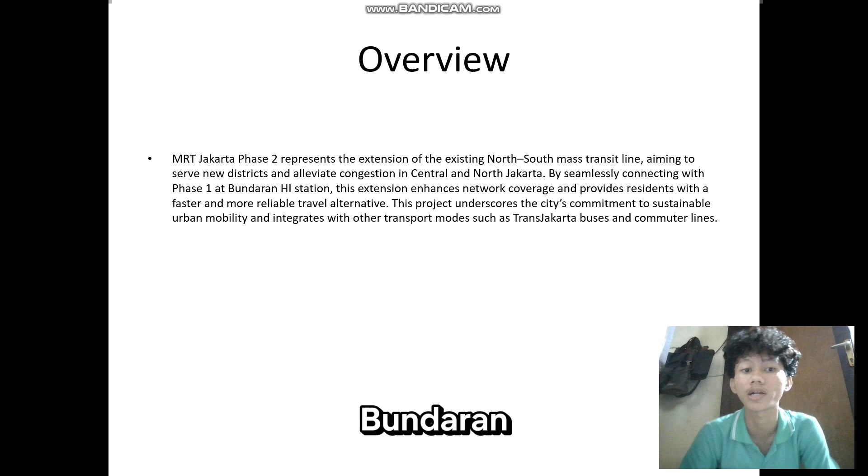So next, by seamlessly connecting with Phase 1 at Bundaran HI Station, this extension enhances network coverage and provides residents with a faster and more reliable travel alternative. So basically, this Jakarta Phase 2 MRT is connected with the first phase at Bundaran HI Station. So with this extension of MRT Jakarta, the purpose is to provide a faster and more reliable travel alternative.

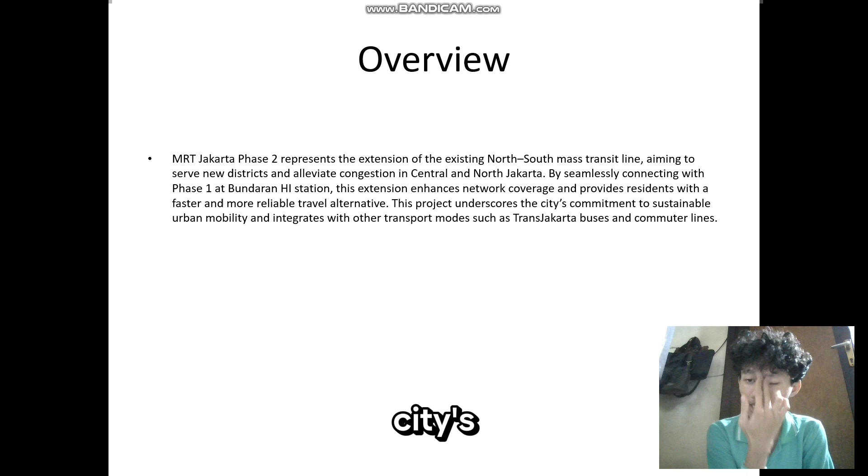So this project underscores the city's commitment to sustainable urban mobility and integrates with other transport modes such as Transjakarta buses and commuter lines. So we are going to the next slide, the name and location. Officially designated as MRT Jakarta Phase 2. So the name of this structure is officially MRT Jakarta Phase 2.

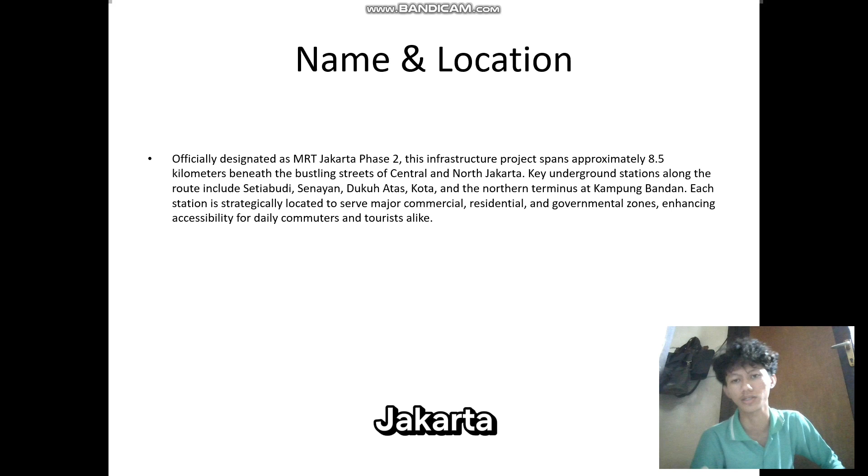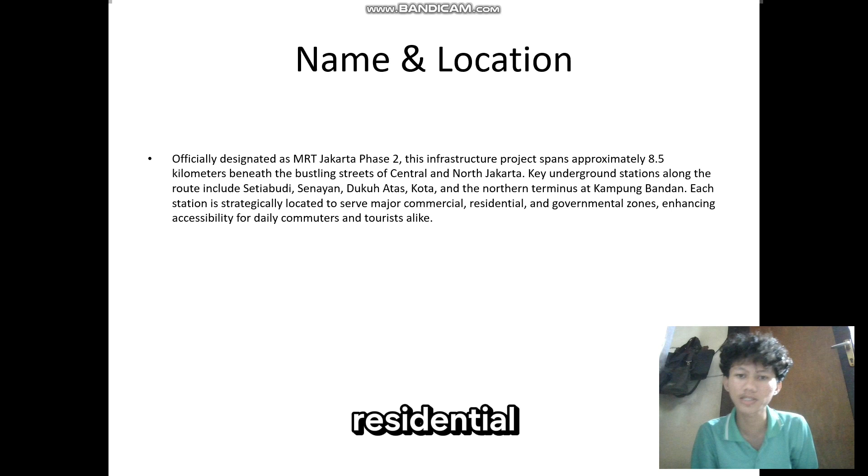And this infrastructure project spans approximately 8.5 kilometers beneath the bustling streets of Central and North Jakarta. So the distance is about 8.5 kilometers. Key underground stations along the route include Setiabudi, Senayan, Dukuh Atas, Kota, and the northern terminus at Kampung Bandan. Each station is strategically located to serve major commercial, residential, and government zones, enhancing accessibility for daily commuters and tourists alike.

So this kind of structure has really positive features, such as enhancing accessibility for daily commuters and tourists alike. It's really futuristic and maybe so useful for the future of Jakarta commuter lines. So we are going to the next slide.

Okay, this slide is providing the purpose and significance. So, the primary objective of MRT Jakarta Phase 2 is to reduce road traffic by offering a rapid, high capacity alternative that bypasses surface congestion. This extension is significant for fostering inclusive urban development as it connects underserved areas with economic hubs, educational institutions, and healthcare facilities. So this MRT Jakarta Phase 2 is really useful to our life in Indonesia, basically in Jakarta, because it's useful for public transit to economic hubs, educational institutions, and healthcare facilities.

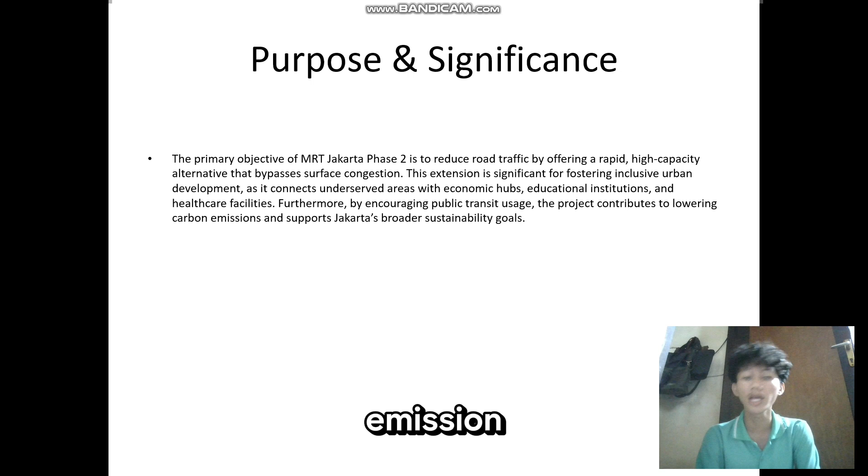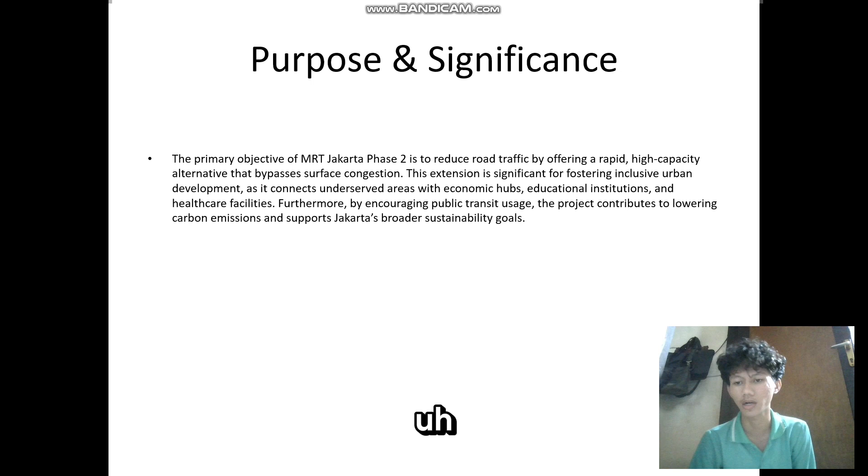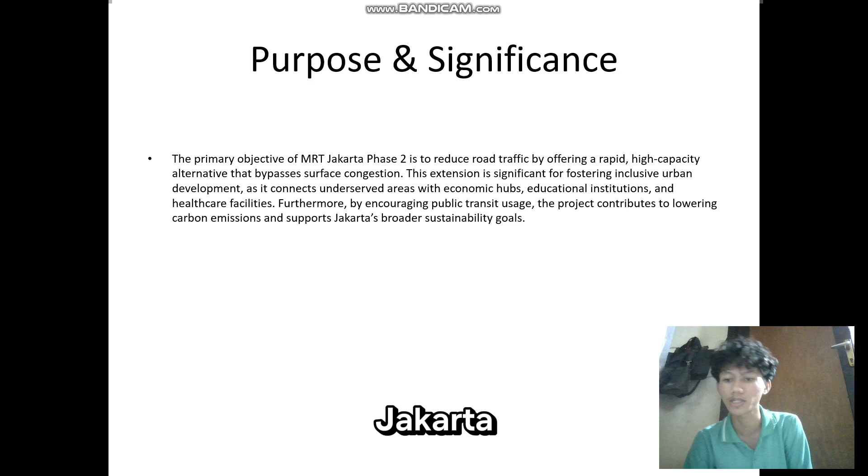Furthermore, by encouraging public transit usage, the project contributes to lowering carbon emissions and supports Jakarta's broader sustainability goals. So, by expanding this MRT, maybe it will encourage the majority of Jakarta society to reduce their usage of transportation like motorcycles or cars, so they can just move to MRT Jakarta to save money, lower carbon emissions and support Jakarta's broader sustainability goals. So we are going to the next slide.

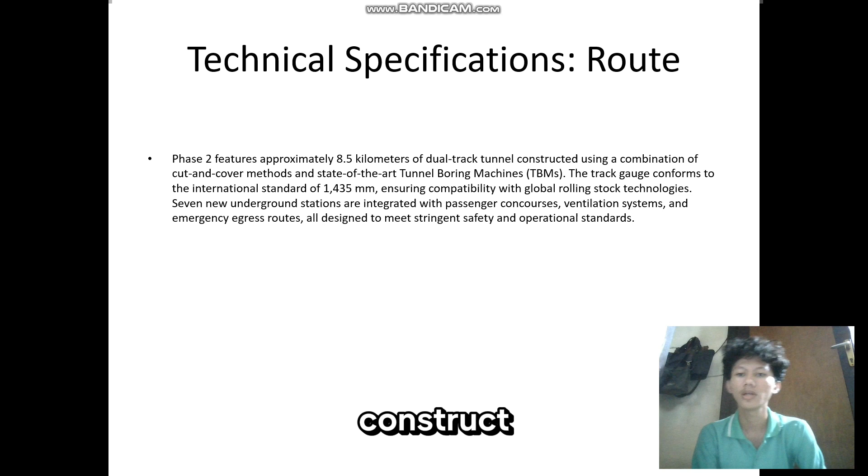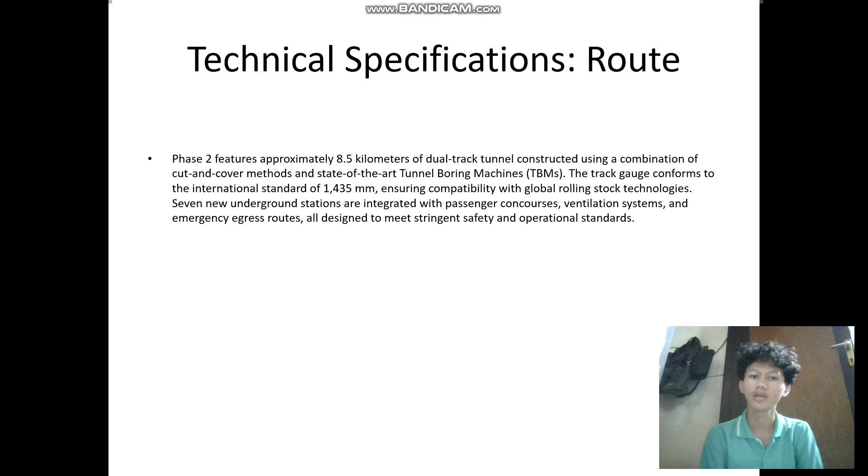The next slide is about technical specification or the route. This phase 2 features approximately 8.5 kilometers of dual-track tunnel constructed using a combination of cut and cover methods and state-of-the-art tunnel boring machines, or TBMs. And the track gauge conforms to the international standard of 1,435 millimeters, ensuring compatibility with global rolling stock technologies. So this MRT Jakarta Phase 2 was really designed with the international standard of 1,435 millimeters in mind.

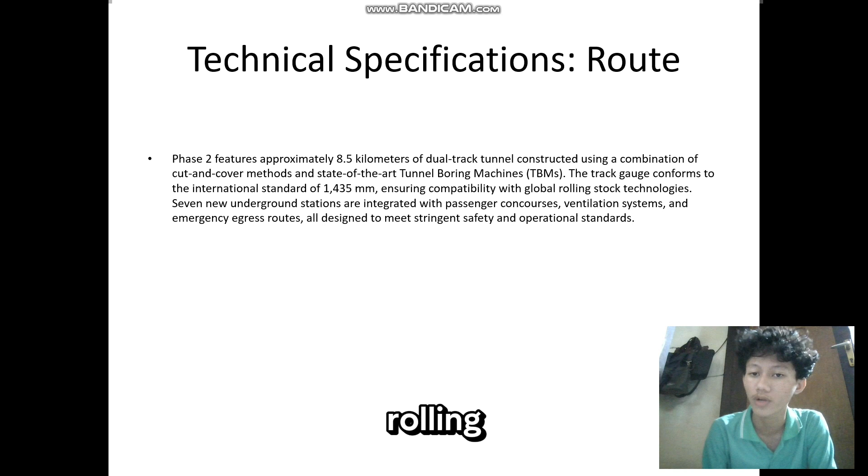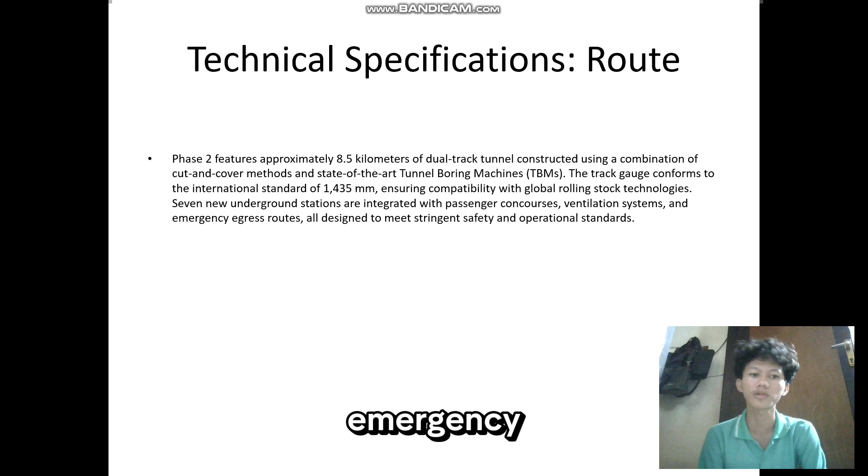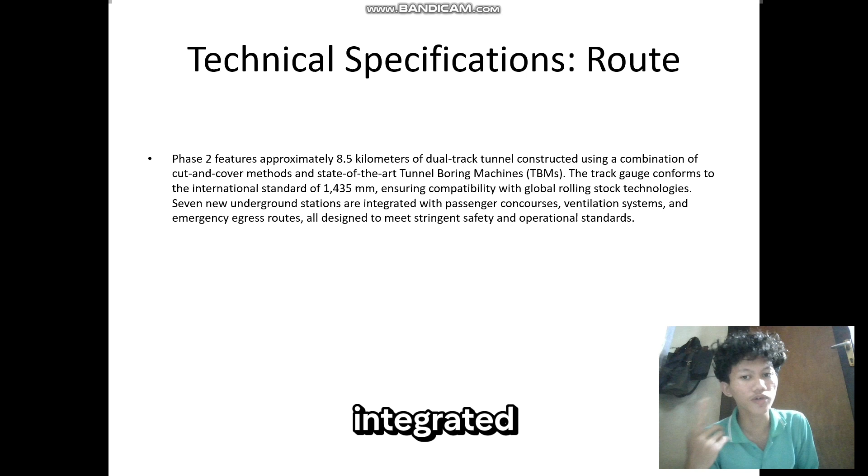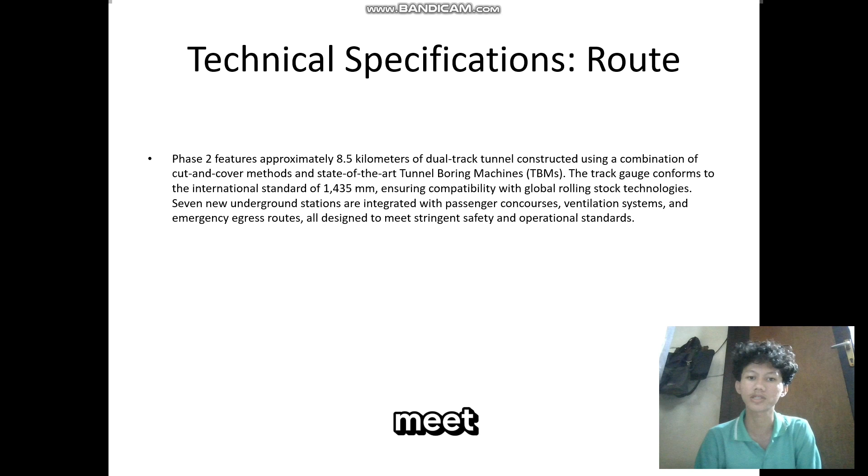And seven new underground stations are integrated with passenger concourses, ventilation systems, and emergency egress routes, all designed to meet stringent safety and operational standards. This MRT Jakarta Phase 2 was really well thought out, again, because it was integrated with passenger concourses, ventilation systems, and emergency egress routes. It's all really useful in emergency conditions. It all meets the safety standards. So we're going to the next slide.

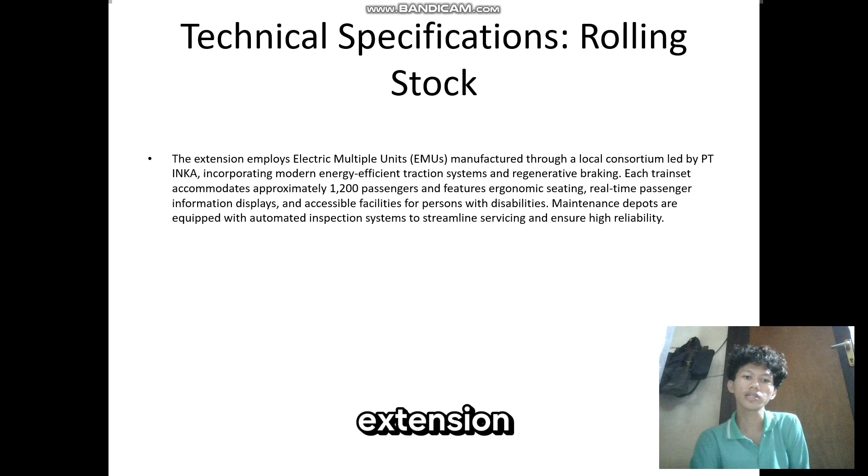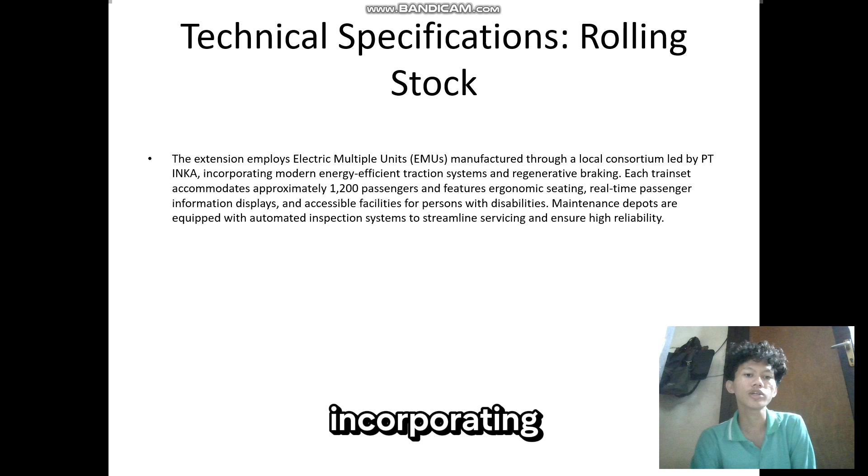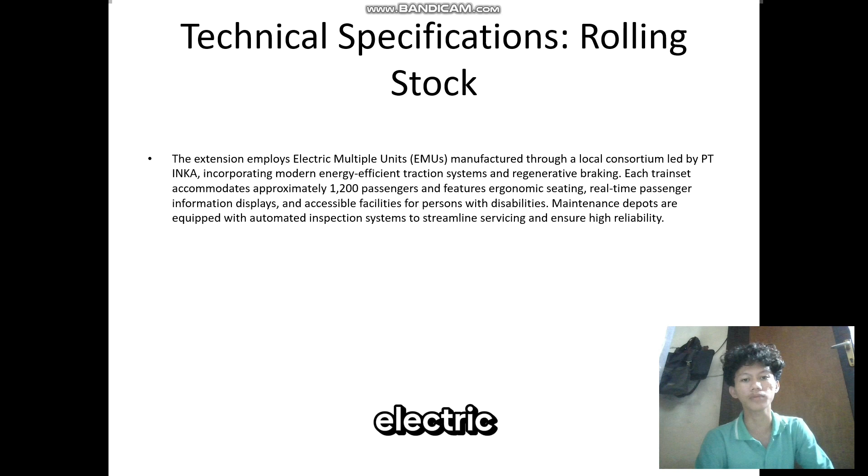The next slide is technical specification in the case of rolling stock. The extension employs electric multiple units, or EMUs, manufactured through a local consortium led by PT INKA, incorporating modern energy-efficient traction systems and regenerative braking. So this extension employs electric multiple units that are manufactured through a local consortium led by PT INKA. They were serving regenerative braking.

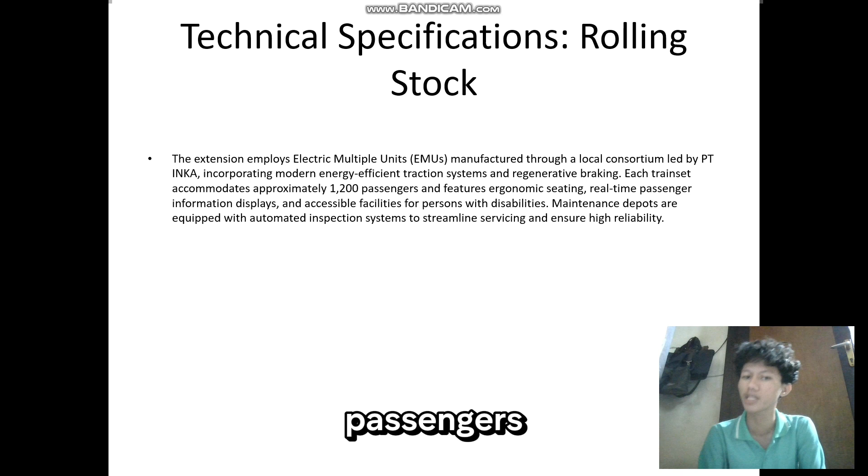Each trainset accommodates approximately 1,200 passengers and features ergonomic seating, real-time passenger information displays, and accessible facilities for persons with disabilities. Its maintenance depots are equipped with automated inspection systems to streamline servicing and ensure high reliability.

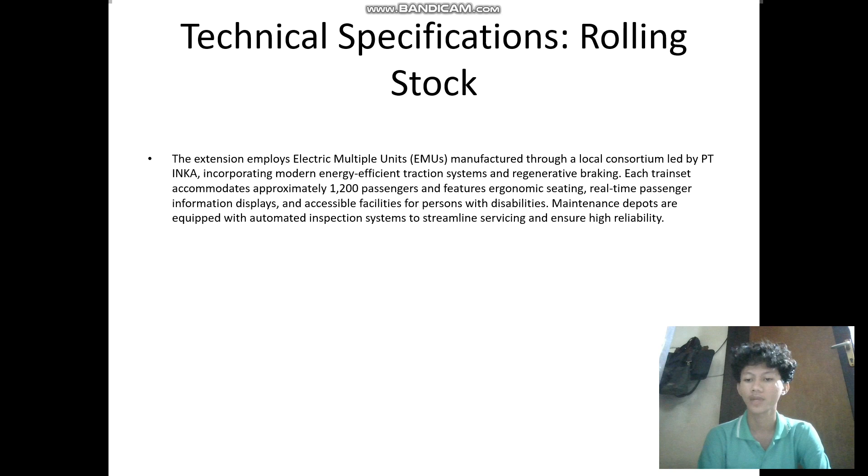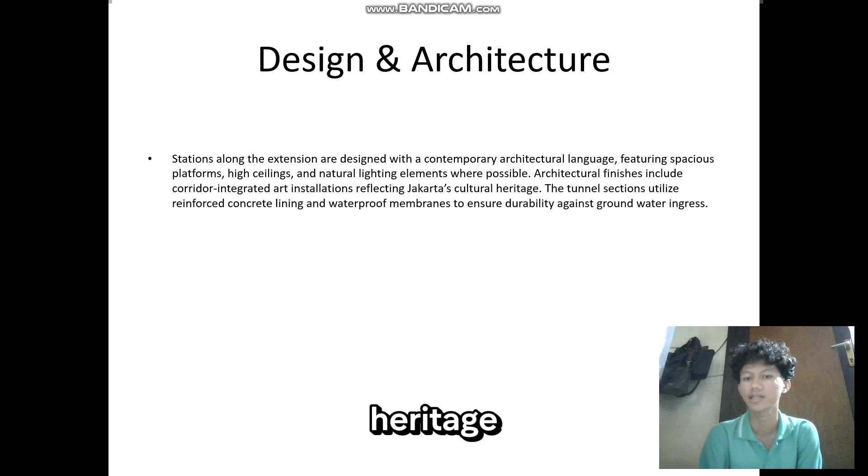So the next slide, the design and the architecture. Stations along the extension are designed with a contemporary architectural language featuring spacious platforms, high ceilings, and natural lighting elements where possible. Architectural finishes include corridor-integrated art installations reflecting Jakarta's cultural heritage. The tunnel sections utilize reinforced concrete lining and waterproof membranes to ensure durability against groundwater ingress.

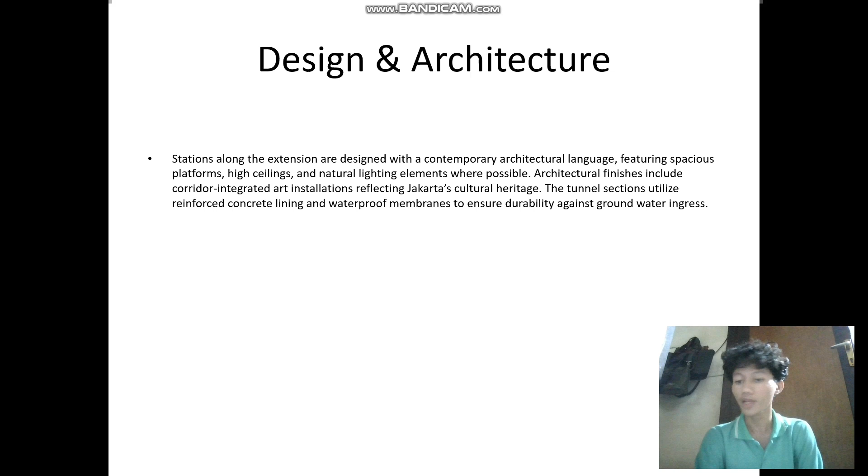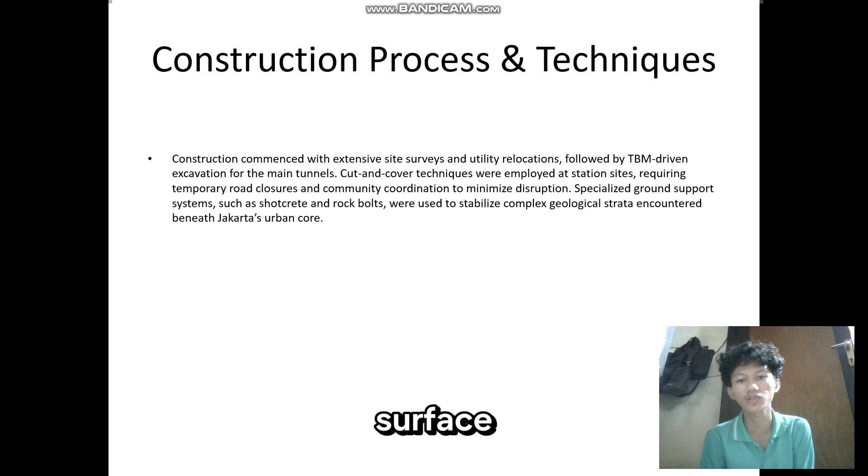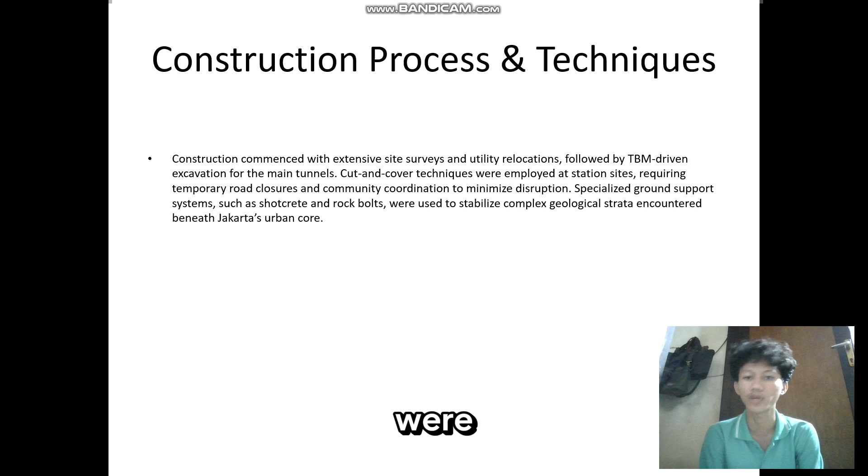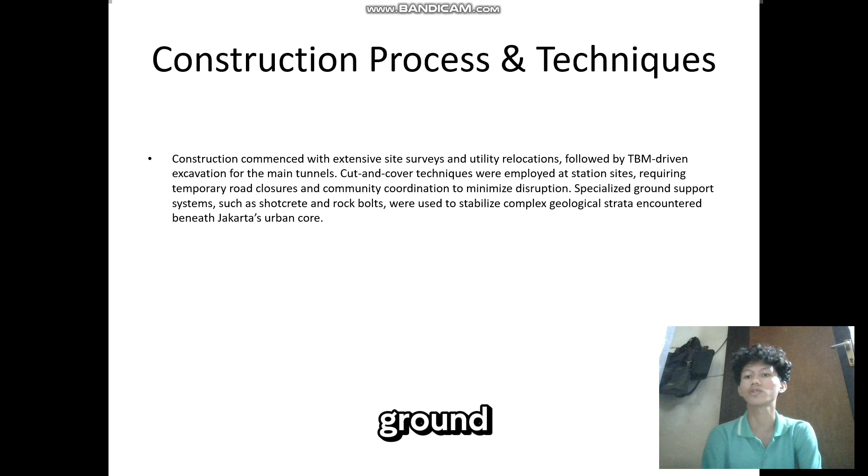So we'll go to the next slide. The next slide is about the construction process and techniques. Construction commenced with extensive site surveys and utility relocation, followed by TBM-driven excavation for the main tunnels. Cut and cover techniques were employed at station sites, requiring temporary road closures and community coordination to minimize disruption. Specialized ground support systems such as shotcrete and rock bolts were used to stabilize complex geological strata encountered beneath Jakarta's urban core.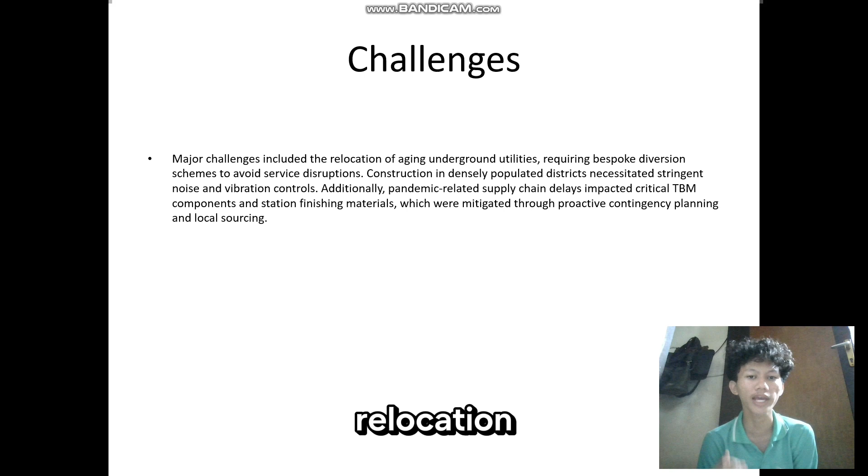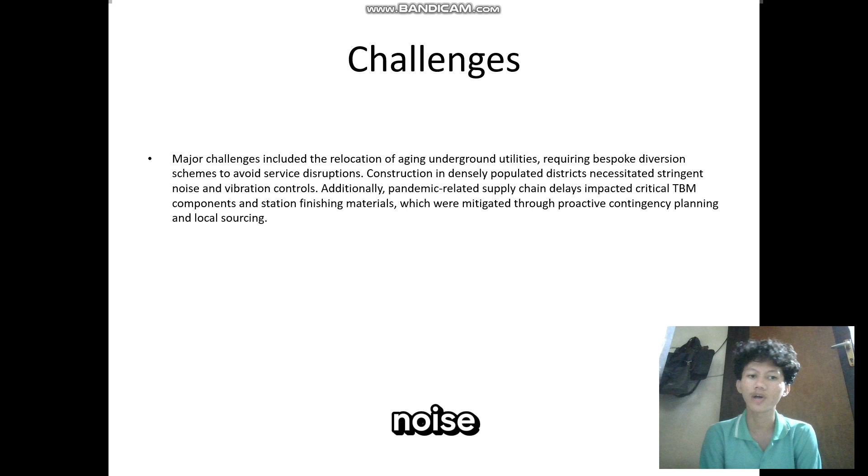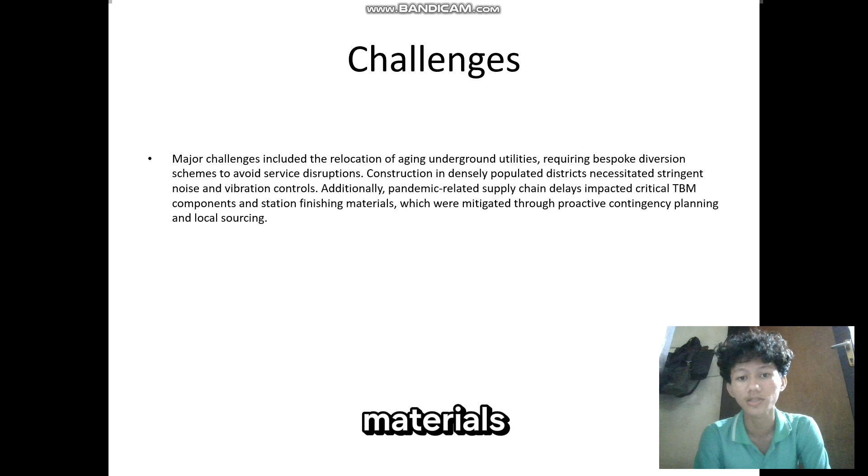Next slide, the challenges. Major challenges included the relocation of aging underground utilities, requiring bespoke diversion schemes to avoid service disruptions. Construction in densely populated districts necessitated stringent noise and vibration controls. Additionally, pandemic-related supply chain delays impacted critical TBM components and station finishing materials, which were mitigated through proactive contingency planning and local sourcing. Next slide.

Environmental assessment identified significant benefits, including a reduction in vehicular emissions due to modal shift and decreased surface traffic. Mitigation measures such as silt curtains and noise barriers were implemented to protect surrounding waterways and residential areas during construction. Post-completion monitoring will track air quality improvement and biodiversity impact in adjacent green space.

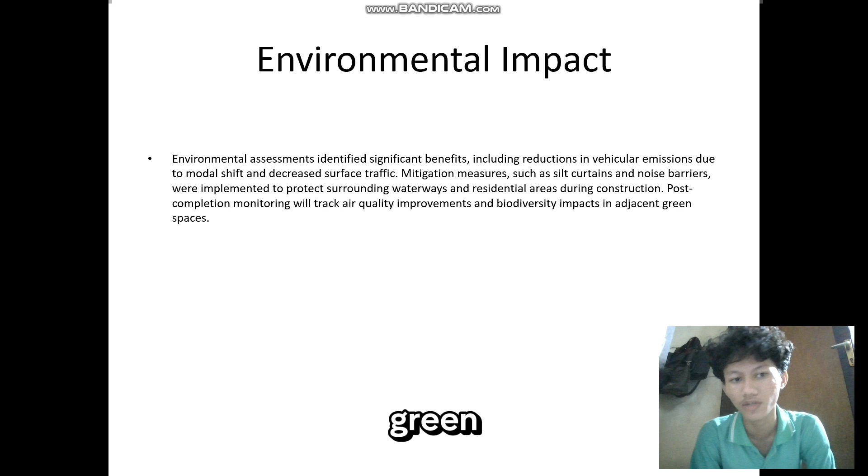Next slide, social impact. The extension is expected to transform commuting patterns, reducing average travel times by up to 40% for thousands of daily users. Enhanced connectivity fosters economic opportunities along the corridor, spurring retail and service development near station precincts. Community outreach programs during construction provided local employment and training opportunities, reinforcing social equity objectives.

Next slide, the current status. As of June 2025, civil works are fully completed and the project has entered an extensive testing and commissioning phase. System tests cover signaling interoperability, emergency evacuation drills, and integrated ticketing trials. Regulatory safety approvals are anticipated in August 2025, leading toward commercial operations shortly thereafter.

Next slide, the future operation. Phase 2 is scheduled to commence commercial service in Q3 2025, offering trains at 5-minute intervals during peak hours. Ticketing integration with existing MRT and Transjakarta systems will enable seamless transfers. Long-term plans include capacity expansion and potential further extension to reach developing northern suburbs.

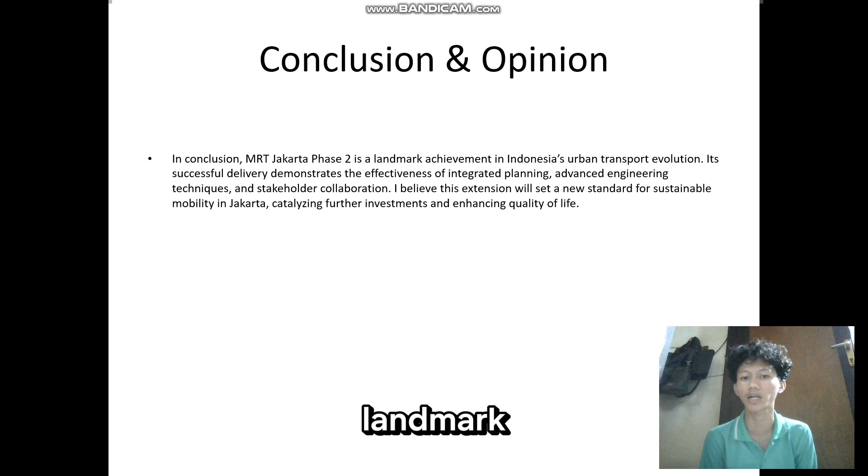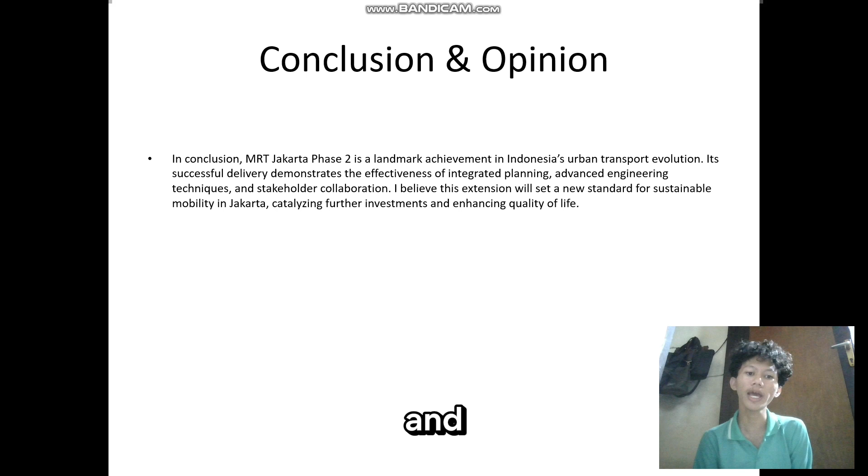Next, the last slide is conclusion and opinion. In conclusion, MRT Jakarta Phase 2 is a landmark achievement in Indonesia's urban transport evolution. Its successful delivery demonstrates the effectiveness of integrated planning, advanced engineering techniques, and stakeholder collaboration. In my opinion, I believe this extension will set new standards for sustainable mobility in Jakarta, catalyzing further investment and enhancing quality of life.